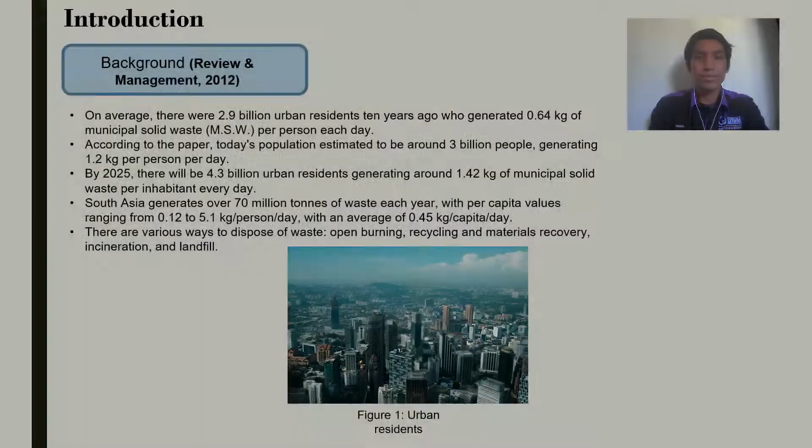Solid waste Malaysia. Solid waste management in Malaysia becomes difficult to deal with because the population increases every year, so it affects the generation of solid waste in our country. Malaysia average generation of solid waste per capita is currently 1.17 kg per day. In Malaysia, landfills are the primary method to dispose the waste because it is easy to operate, requires less technology and technical feasibility.

Issue number 1. Several landfills already reached their maximum faster than their estimated lifetime as a result of fast-paced urbanization and population growth. For issue number 2, incineration is one disposal method, but the cost of operating is very high because its installation is an expensive process and it requires highly trained workers. Service for solid waste collection is only offered in metropolitan areas, while residents in rural regions dispose the solid waste by burying or open burning, which contributes to illegal dumping. So, this proposed analysis is on a small-scale incinerator that is suitable for home use.

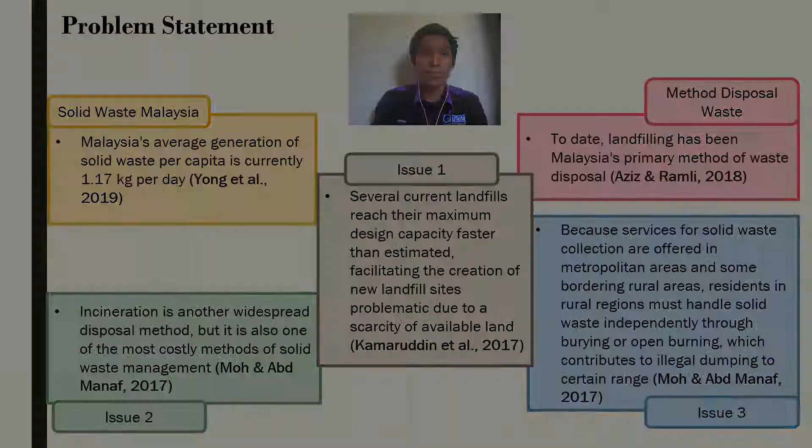Objective number 1 for this project is to design the small-scale incinerator in SolidWorks software. Objective number 2, to perform the simulation of the small-scale incinerator in SolidWorks software. Objective number 3, to analyze and validate the simulation analysis data.

Scope number 1 for this project is type of incinerator is small-scale incinerator for household use. Scope number 2, type of material used for the drum of incinerator is 1023 carbon steel sheet, which is used in the market. Scope number 3, parameter of drum. The drum thickness is 6.9 mm. Then in this analysis, there are 3 designs of drum: Design A 100 liter, Design B 150 liter, Design C 200 liter.

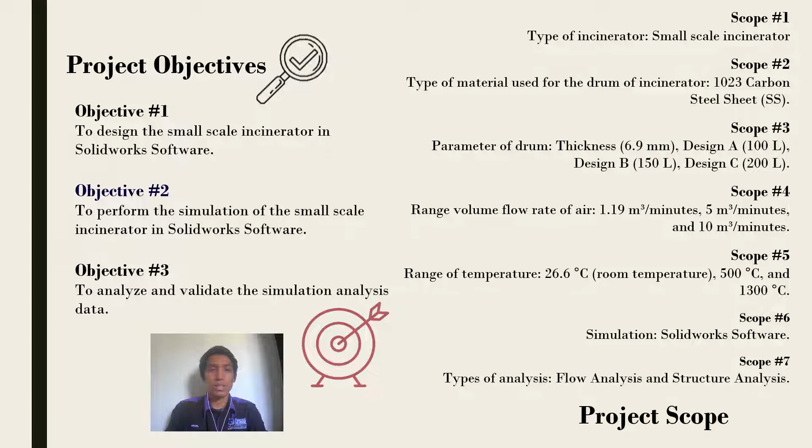Scope number 4, range volume flow rate of air. There are 3 different volume flow rates used: 1.19 meter cube per minute, 5 meter cube per minute, and 10 meter cube per minute. Scope number 5, range of temperature. There are also 3 different temperatures used in this analysis: 26.6 degrees Celsius, 500 degrees Celsius, and 1300 degrees Celsius. Scope number 6, simulation uses SolidWorks software. And scope number 7, type of analysis. There are 2 types of analysis in this project: flow analysis and structure analysis.

Author Kamaruddin in 2017 tells about generation of solid waste in Malaysia and relationship among urbanization, waste generation, and availability of landfills. Second is from Ismail in 2013. It says the challenge of the landfill process in Malaysia with limited space available in this country and concern about environmental effects from landfill. Next is from Moh and Abdul Manaf in 2017, it talked about solid waste management and disposal method in Malaysia, also number of landfills and incinerators in our country.

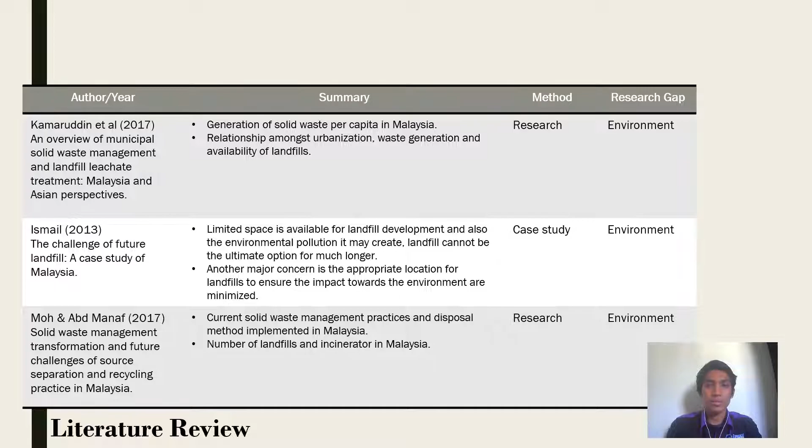This is the methodology process flowchart. It starts with design survey questions in Google Form, which we want to know some detail from respondents and their knowledge about the incinerator. Then the survey is distributed through social media, and data collected from the survey. Next is design small-scale incinerator in SolidWorks software. Then run simulation, collect data and obtain analysis.

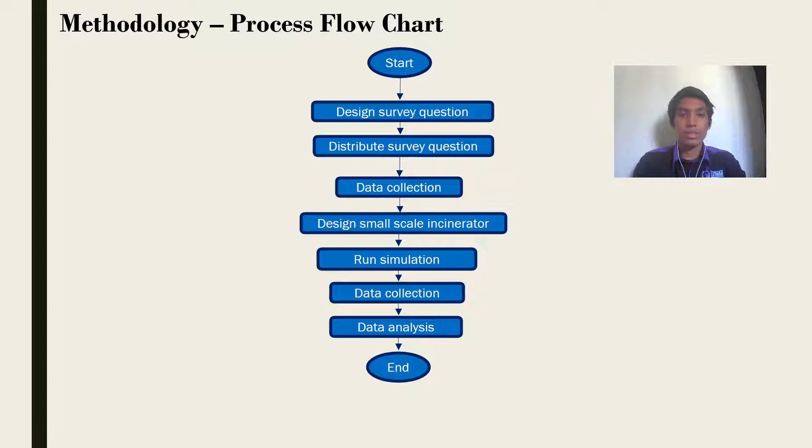To achieve objective number 1, we refer to literature review and distribute survey questions to respondents. Then design the small-scale incinerator in SolidWorks. Then to perform the simulation, we use flow and static simulation by using SolidWorks software. In flow simulation, there are two parts, flow trajectories and cut plot. Static simulation also has two parts, which are maximum pressure test and temperature set to 800 degrees Celsius and 1300 degrees Celsius. And lastly, we do flow and structure analysis from simulation data.

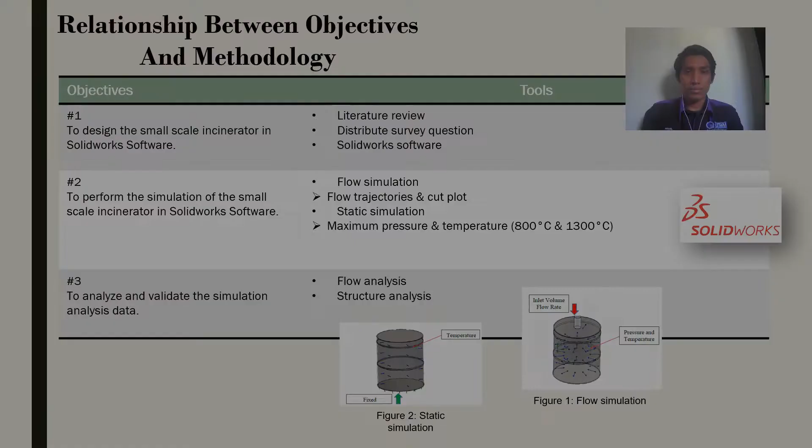For flow analysis, flow data were analyzed in two sections, flow trajectories and cut plot. Flow trajectories are used to analyze the airflow in the drum. Cut plot is used to analyze contour in the drum. As you can see, this is the boundary condition for flow analysis. The fluid type used in this study is air.

Next, there are three different simulation temperatures. Temperature 1 is ambient or room temperature, which is 26.6 degrees Celsius. Temperature 2, 800 degrees Celsius. And temperature 3, 1300 degrees Celsius.

For volume flow rate, we have three values. Volume flow rate 1 is 1.19 cubic meters per minute. Volume flow rate 2 is 5 cubic meters per minute. And volume flow rate 3 is 10 cubic meters per minute.

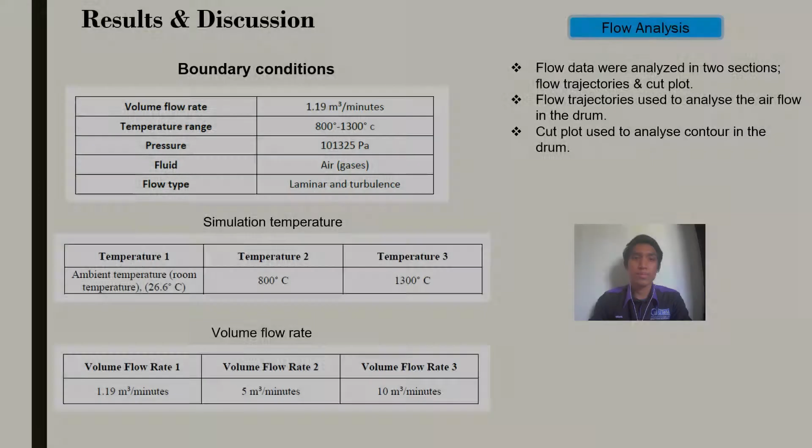This is the flow trajectories for design A. The different values of flow rate and temperature are tested on each design. From the table, the change of temperature and volume flow rate does affect the air velocity. Same goes for design B. The value of velocity is affected by the change of temperature and volume flow rate.

And lastly, in design C, the pattern of the airflow is the same as design A and B. The difference of temperature and volume flow rate does not affect the pattern of the airflow entering the drum.

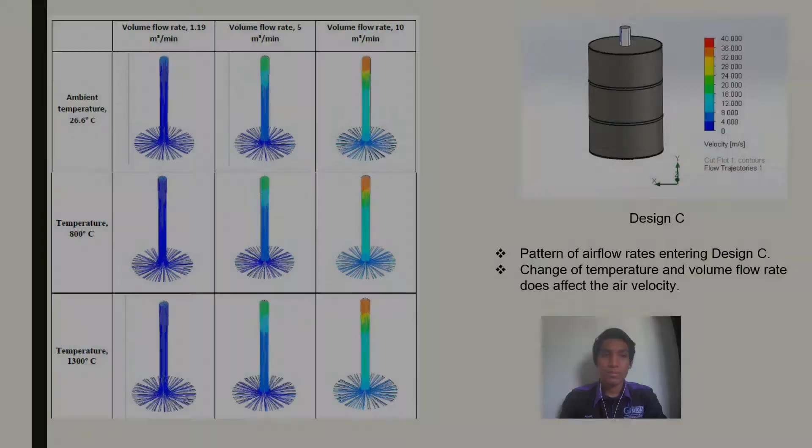And this is the cut plot section. All of the designs were exposed to different volume flow rates and temperatures. The data shows the volume flow rate influences the temperature inside the drum. When the volume flow rate used is 10 cubic meters per minute, the temperature at the bottom of the drum is low compared to a volume flow rate of 1.19 cubic meters per minute.

Based on all the temperature patterns, design B shows that all volume flow rate values tested on it do not affect the temperature level very much compared to design A and design C.

Structure analysis. Structure data were analyzed in two sections, maximum pressure and set of temperatures, 800 degrees Celsius and 1300 degrees Celsius. From the figure, there is the boundary condition for structure analysis.

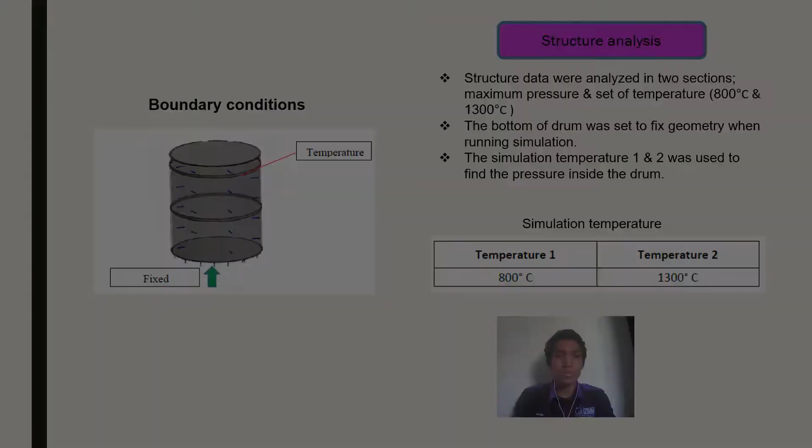Maximum pressure. All of the drum designs were tested to find the maximum pressure that the drum could withstand before deformation. From the data, design A has the highest maximum pressure value, and design C has the lowest maximum pressure value. From the simulation, all of the drum designs show deformation with different deformation scales.

According to the data, all of the designs in different volumes do not deform after being exposed to temperatures of 800 degrees Celsius and 1300 degrees Celsius, so all of the small-scale incinerator designs are safe to use within the temperature range of 800 degrees Celsius to 1300 degrees Celsius.

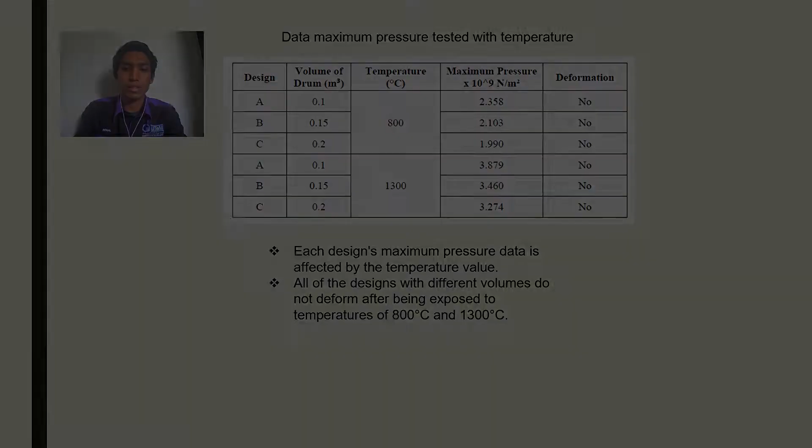In practice, there are many ways that the analysis of the small-scale incinerator process can be improved, depending on the design and the way to burn the solid waste. This thesis presents a method for analyzing the flow and structural analysis of the small-scale incinerator by SolidWorks simulation. The main feature of the analysis is that it establishes a simple and effective simulation of all of the designs. Overall, the research presented in this thesis has succeeded in making analysis for developing the prototype of the small-scale incinerator.

For recommendations, the first is to create a better design for the small-scale incinerator for easy use. Second, develop a system to help users dispose of solid waste, like a portable incinerator that can easily move. The third is to include research to establish a better flow rate for the air entering the incinerator. And lastly, develop a better system for the small-scale incinerator to operate the disposal process. For example, the incinerator could have a switch to start the fire.